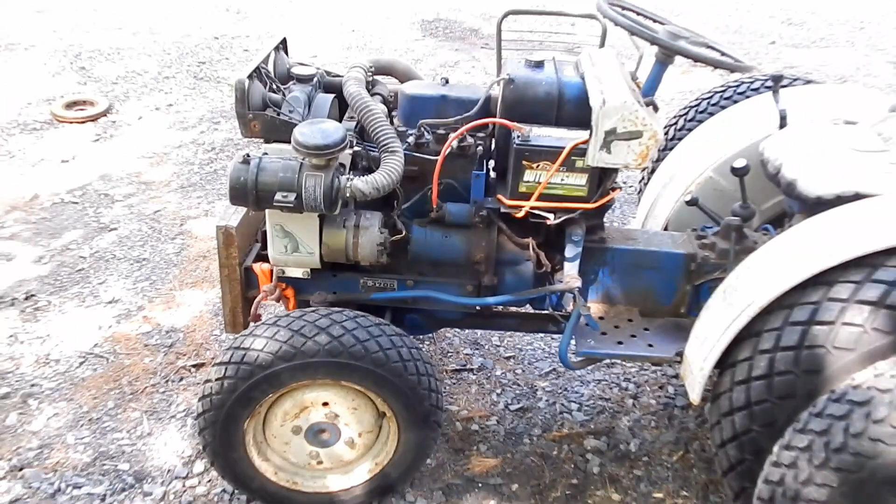Satoh Beaver, small tractor, from the late 1970s, around '78 or so. In the early 70s, 60s, and maybe the 50s, Satoh made tractors with diesel and with gasoline engines, the Mazda gasoline. In the late 70s, they decided to go with this Mitsubishi.

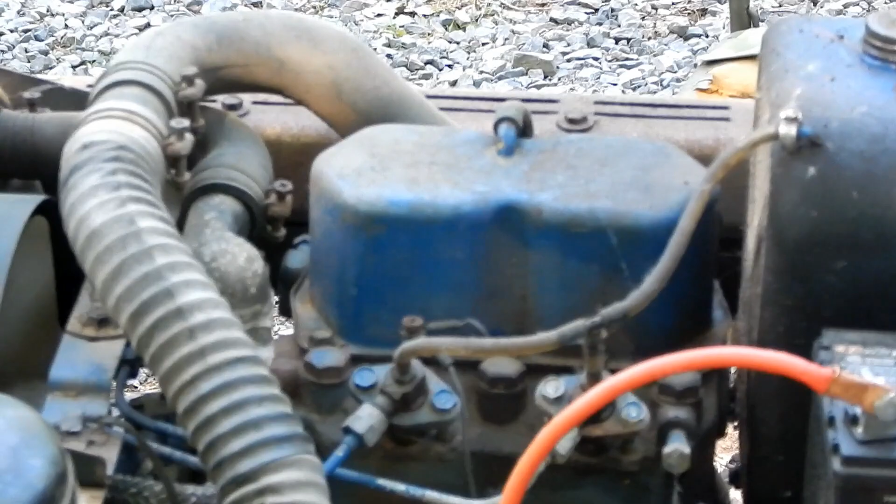Two-banger right here. Underneath that valve cover are two rocker arms from them. Overhead valve diesel engine, Mitsubishi diesel.

It's a good little tractor. I've had it for about 20 years. The only maintenance I've ever done on it was changing the oil about 3 or 4 times. Haven't done anything else. Oh, I sharpened the mower blade.

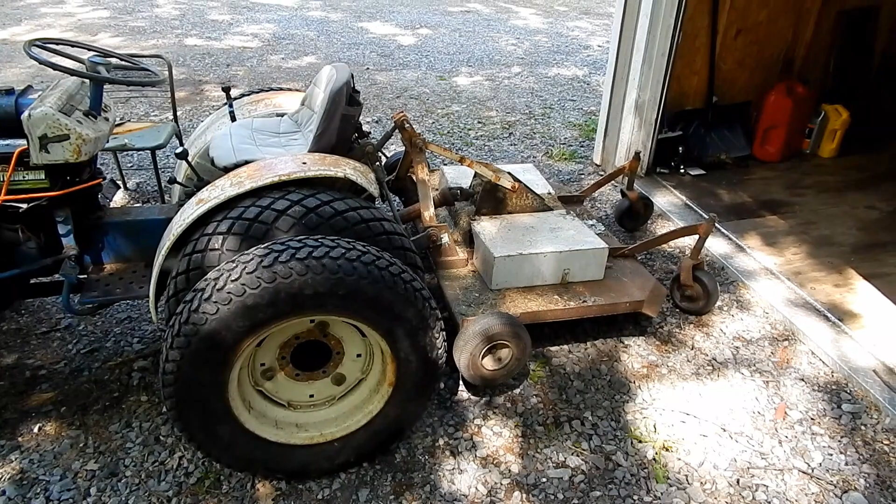Back there is a mower deck. Looks like a brush hog, but it's not, it's a finish mower. Every year or two I got to sharpen the blades.

Does a really great job. It's 48 inch.

I got dual tires in the back because I got a lot of hills and I don't want to tip the tractor sideways on these hills, especially when you got a rock on one tire and a gopher hole on the other, and the whole thing flips over and you die. I can't do much about tipping backwards, so I just want to be careful going up hills. I don't want to tip it going sideways, so I got dualies on the back.

It's 4-wheel drive. I keep it in 4-wheel drive all the time.

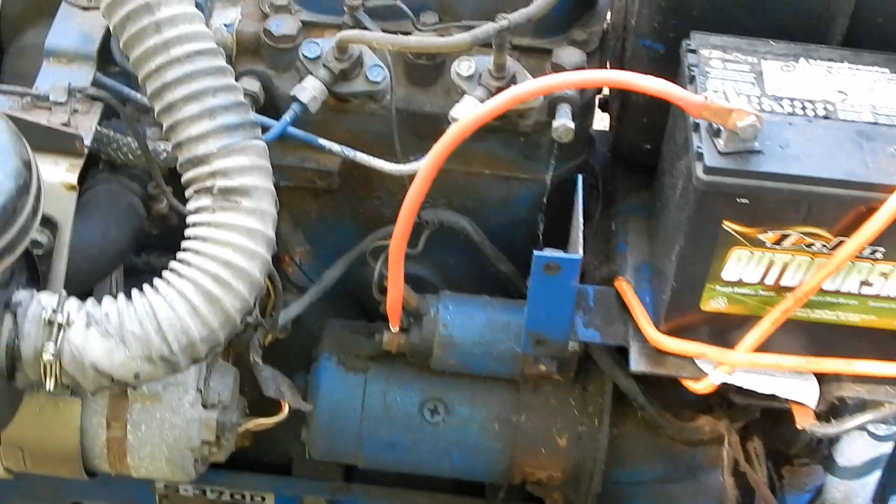It's got a little battery. Those two metal lines are the diesel under pressure, and that line there is an overflow diesel going back to the tank. It's got a tank about 5 gallons maybe.

Air filter, I've never even looked at that. Radiator, headlights, which don't work. I'm not really going to be using headlights. Got a horn. No horn.

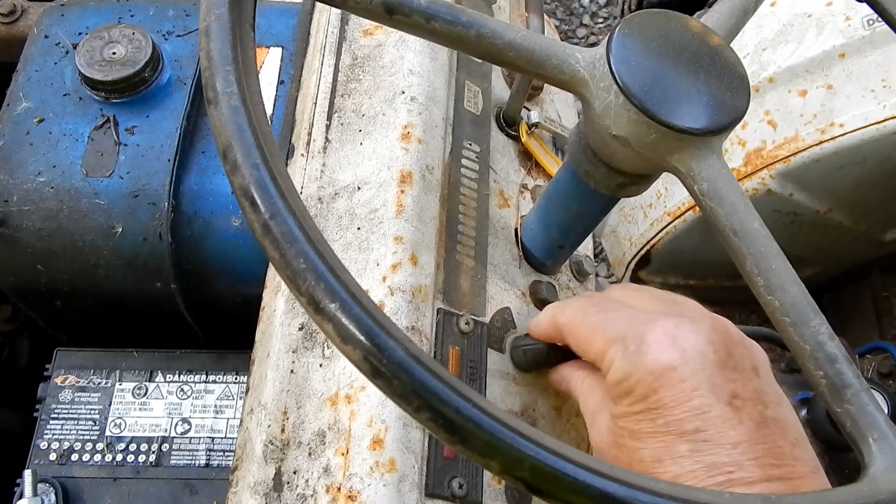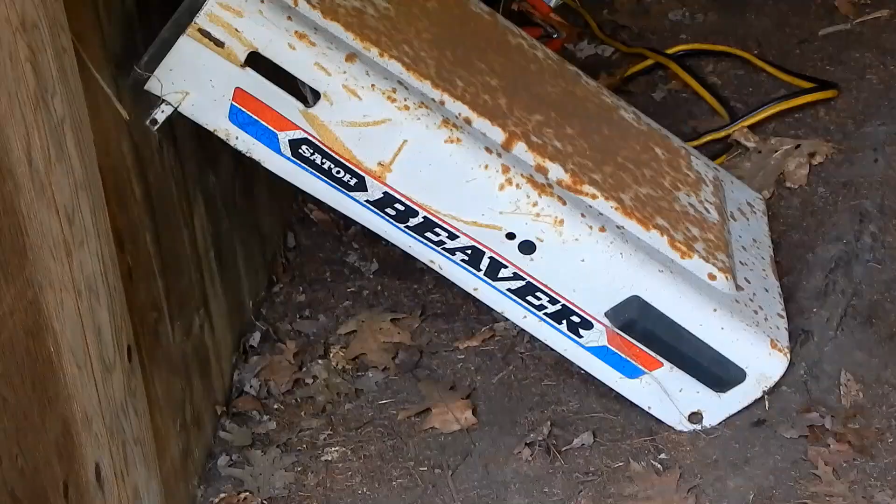It's got a bonnet, which I'm not using now because in the summertime it tends to sometimes overheat after several hours of using it on a hot day. It runs a lot cooler when you take the hood off. It's a bonnet, there's a hood.

Starter motor, solenoid, alternator.

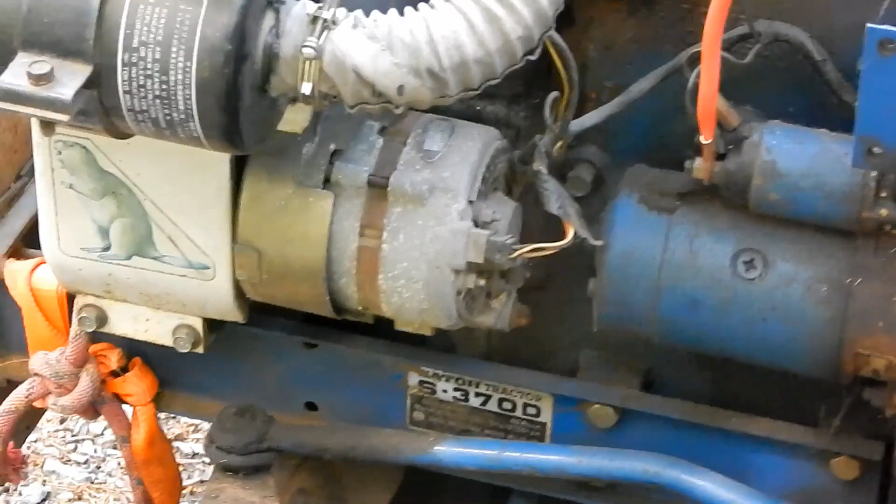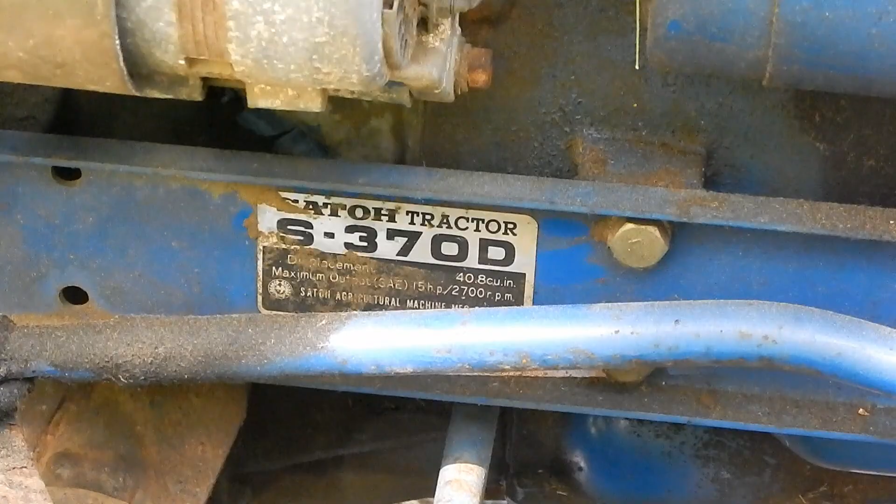It's a Satoh 370D. The D stands for 4-wheel drive. I would think D should stand for diesel, but they figured if D is, you know, D is the 4th letter of the alphabet, 4-wheel drive.

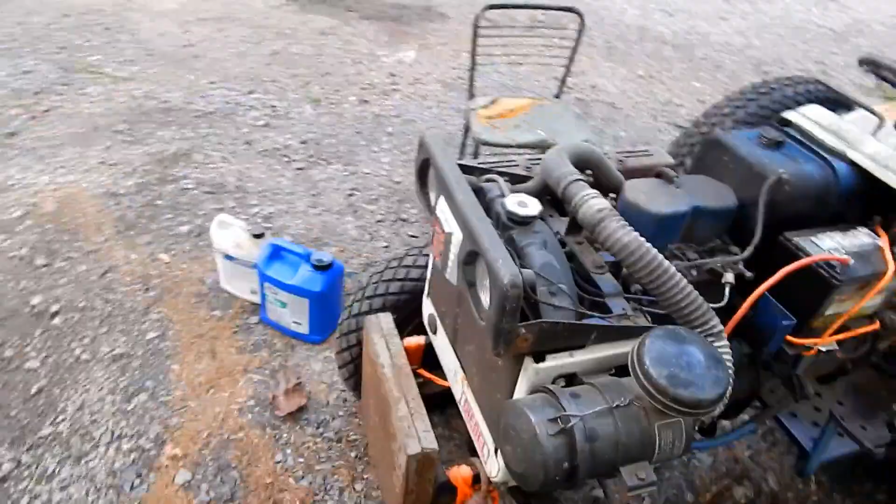I haven't changed the radiator fluid in 20 years either. That's going to be good. That's going to be going next.

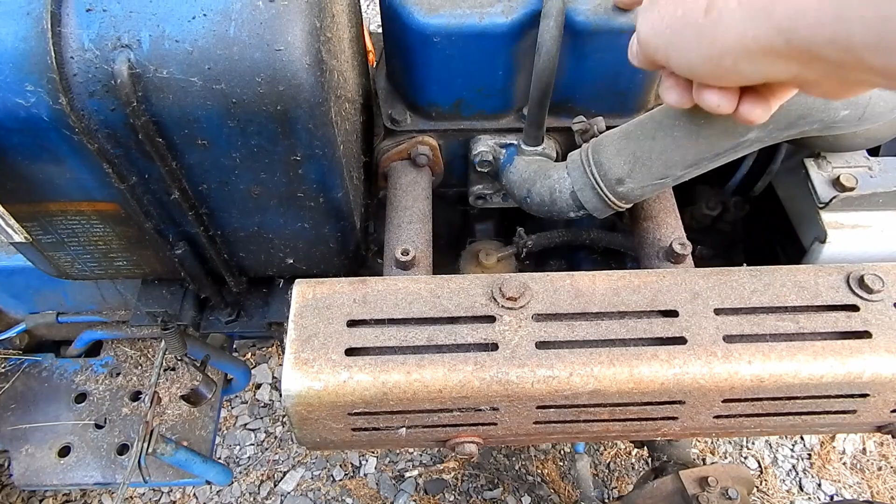There's the muffler. Radiator hose coming over. Well, that's the air hose. Right under here, this is the valve cover. Have never taken that off yet.

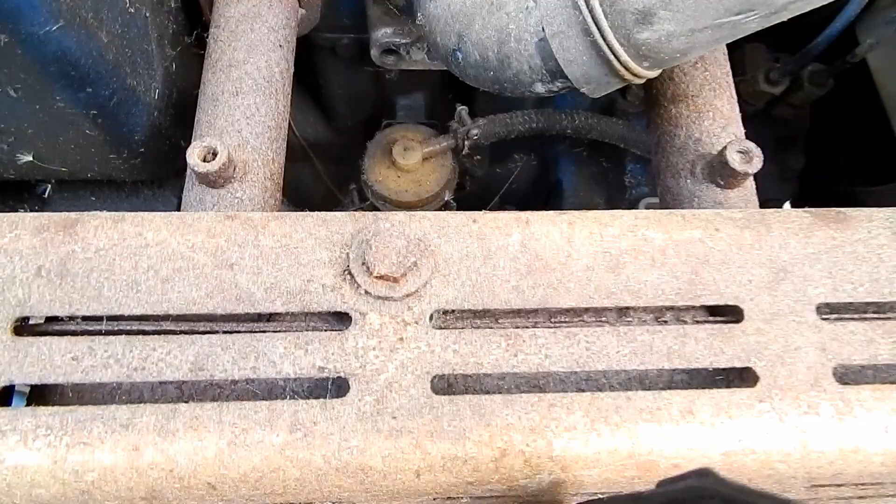Exhaust manifold. That looks down there like the fuel pump. Since it's... yeah, that's the fuel pump because there's the fuel tank. Line goes to the pump, and from the pump it goes to this thing over here, which separates it into, well, that's probably the fuel injector rail of some sort.

Sends it off to those two, which you already saw. Go around, they go around the front here. Those two went up over here, send it to the fuel injectors.

And what about what we got down here? Today's the day that I do the first real maintenance on this thing in 20 years. I'm going to change the hydraulic fluid. The hydraulic fluid is in the gear case.

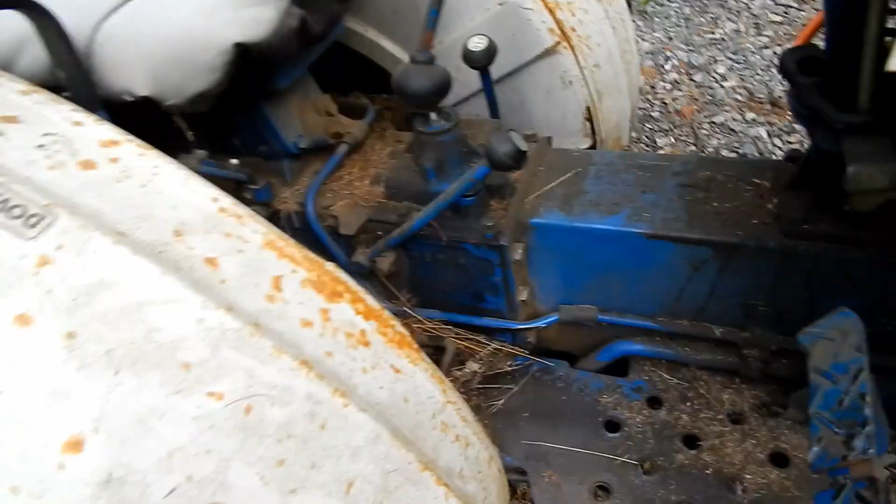This rubber thing here, it's just a little rubber cap. It comes right off with the bare hand. That's where you put in 2.5 gallons of hydraulic fluid.

The hydraulic fluid is basically 80 weight grease. I got some 90 weight, 2 gallons of 80 weight grease, from Walmart. And some 90 weight, which is probably about the same. We use that in cars in the rear end.

That'll be enough to change the... Okay, what we got here? This is the hydraulic pump. There's the engine. This is where you have the...

Well, you change the engine oil. Obviously I'm not going to teach you how to change the engine oil. If you don't know how to change the engine oil, you're an idiot and you shouldn't be watching this video.

But just so you'll know, down under here there's a drain plug for the engine, the oil pan. Here's where you put the oil in. There's a dipstick on the end of that cap, and here's the engine oil filter.

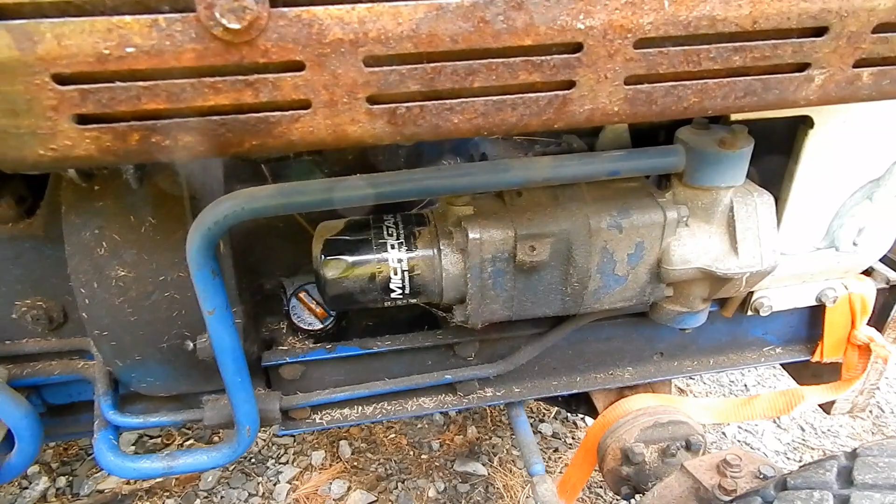Now, why is the engine oil filter on the exact same piece as the hydraulic pump? At first I thought maybe the hydraulic pump works on the engine oil from the engine, kind of like the old fluid clutch 1950 Dodge Coronet that I used to have. The fluid clutch works off engine oil from the engine.

But it's not. The engine oil pump runs off the same gear off the camshaft as the hydraulic pump. The hydraulic pump pumps hydraulic pressure out this thin line. This thin line goes down, wraps around there, goes back under the seat.

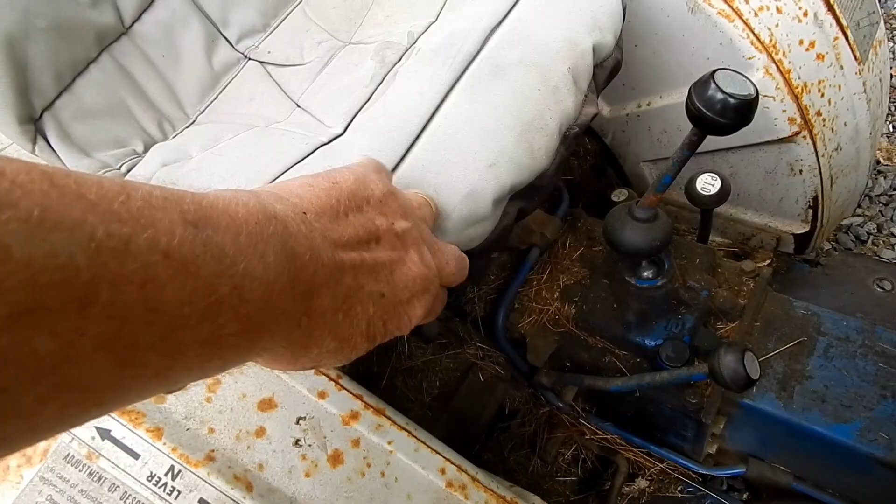You lift the seat, well, lift the seat from the front, and you can see it's kind of underneath all this grass clippings.

There's the line right there, see it underneath all that grass clip. The line goes to the hydraulic cylinder and piston in the back to raise and lower this. That's all it does. It would do more if I had different implements in the back, but all that hydraulic does is raise and lower the mower deck.

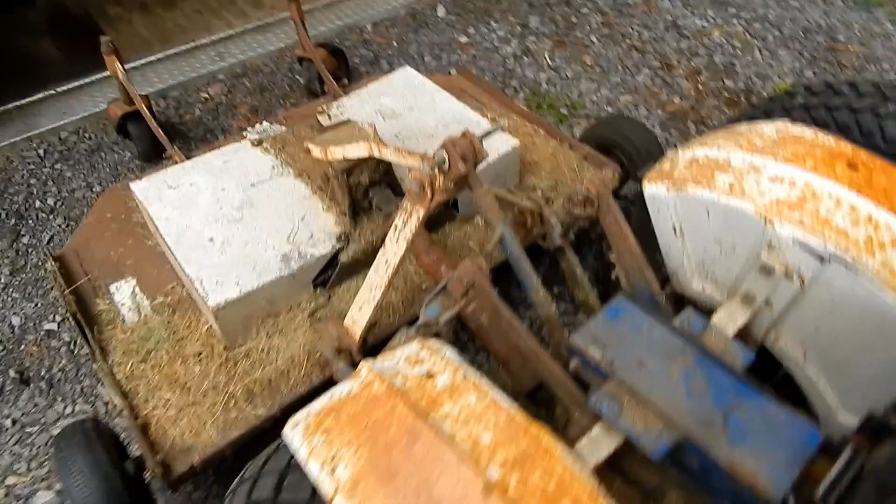Big whoop. There's the seat back. Here's the control for the mower deck. Here's the mower. When the engine is running, you can raise it. When the engine is off, you can lower it.

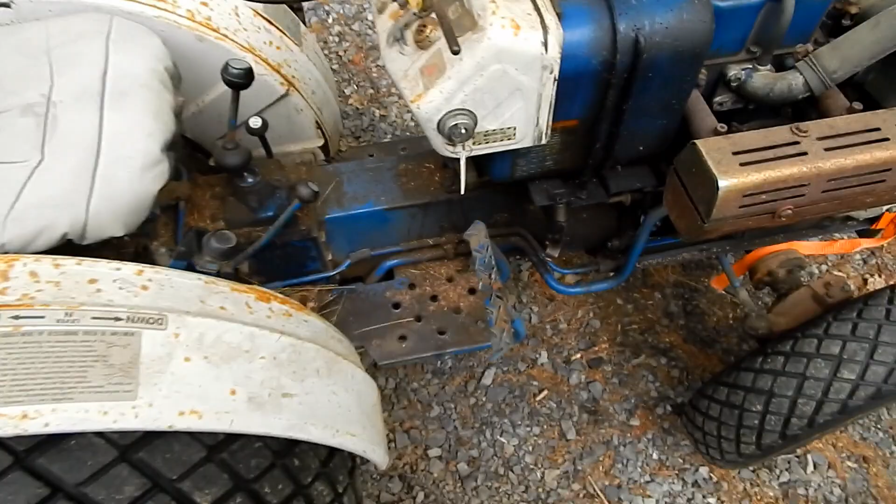And when you lower it, it pushes hydraulic fluid back into the transmission, which is the 8-speed. Well, it is 8-speed. You got 1, 2, and 3, and reverse, and you got 4, 5, and 6, and fast reverse. And over there, that turns the PTO into different gears.

Somewhere around here, well, this is a differential lock, which I don't use. Well, it's actually broken. It doesn't work. The differential lock, I don't need it. There's no mud around here.

The brakes, there's a right brake and a left brake, and they're locked together. In case you're on a big field and, I don't know, you can brake. When you lock them together, they brake both wheels at the same time.

So that's good enough. The skinny line goes to the hydraulic, well, it's the hydraulic pump. The skinny line goes to the opposite of pump, to the whatever it's called.

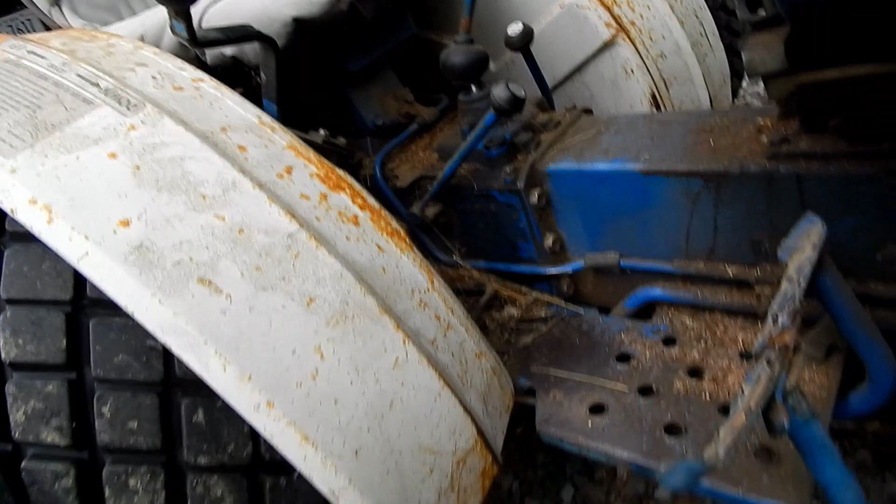This big hose here, well, it sucked. The pump presses out, so it has to suck in on the big line. The sucking of the big line goes to the bottom of that, and there's a big filter on the bottom of that, which I got to change. See, there's the skinny line of pressure going out back to the mower deck, and the big line sucks hydraulic fluid from the pan at the bottom of the transmission, bringing it back to the big line on top, bringing it back to the pump.

Pumps it out, sucks it in. I'm going to put a big pan underneath here. It's 2.5 gallons.

I'll show you how. I didn't know where to drain it from until I finally got the owner's manual. I've never had the owner's manual before. Really weird how you get the hydraulic fluid out of that. After draining it all out, I'll change the filter or clean the filter, put it back in, and put all the fluid back into this rubber thing.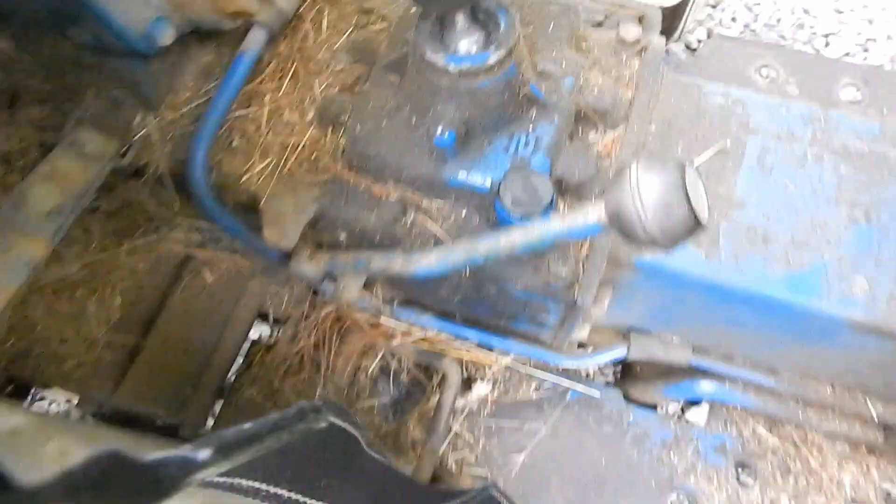This rubber thing right here, you just... see that? Every once in a while I put some fluid in there. That's all it is. Okay, I'm going to start doing that now.

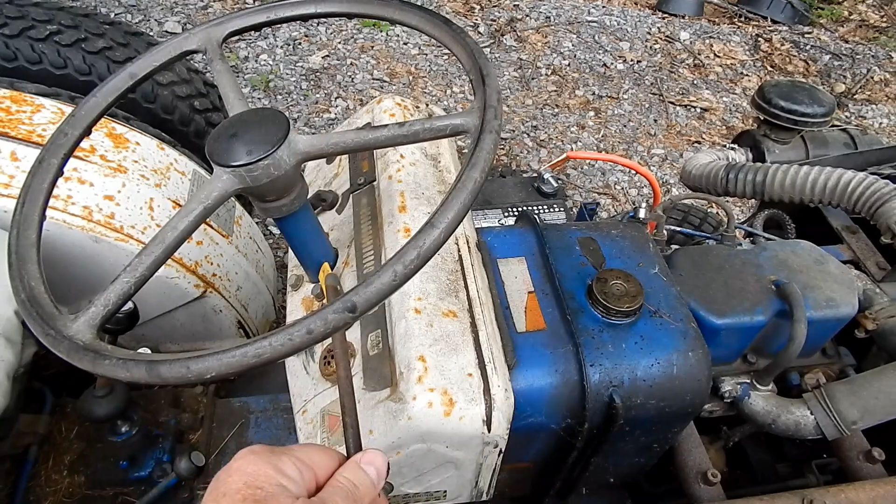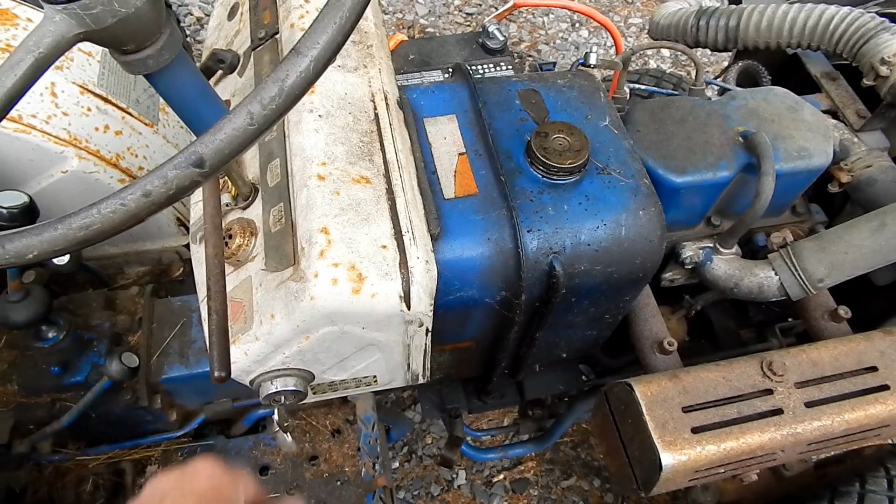This here is the throttle. This is low idle, faster idle, real fast. And when you want to stop it, you press it all the way up, turn the key to the off position, and then you press more and that shuts it off. Otherwise it's going to just diesel forever.

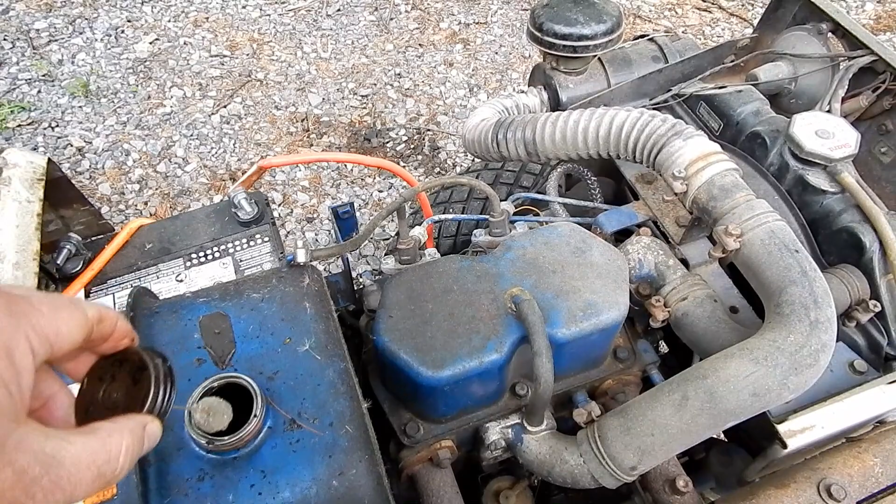Real quickly, actually, there's no fuel tank gauge. I use a stick, a paint stirring stick, and this here, it's a brush from PVC glue.

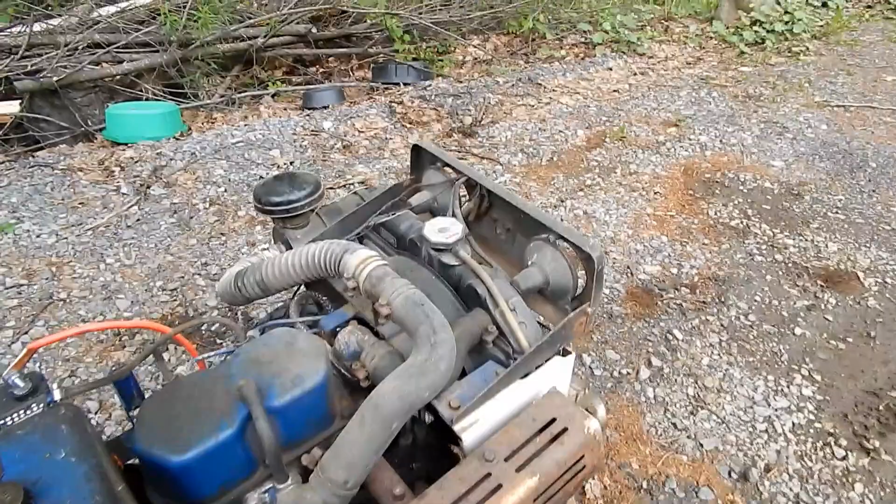All right, I'm gonna change the hydraulic fluid. I'm gonna change the front axle fluid, the front final drive fluid, and the radiator. That hasn't been changed since I've owned this thing. I just keep adding fluid to it if it needs it, never bothered to drain it. And if I go crazy, I might even open up the air filter and see how that looks.

What else? Oh! Why not? Since we're going hog wild crazy here, why not take the fuel filter out and see what I can do? Where would I get a new fuel filter? Take it out, clean it with soap and water maybe, and just put it back.

Who knows? I've never had to do any maintenance on this thing. I think one time one of these two return lines broke, so I went to the hardware store and got some new fuel lines. That's all. I mean, this is like maintenance free, or repair free. It's only maintenance free because I don't ever do any maintenance.

About time. I bought this thing back in 1998 and now it's 2023. That's 25 years I've had this freaking thing. I don't even know where the damn clutch is. Brakes, I don't repair them, I don't fix the brakes. All I've done is put dualies on, sharpen the mower blade, and change the oil a couple of times.

And there you have it. Satoh Beaver with dualies.

I used to have a big weight in the front. That fell off. Don't need it.

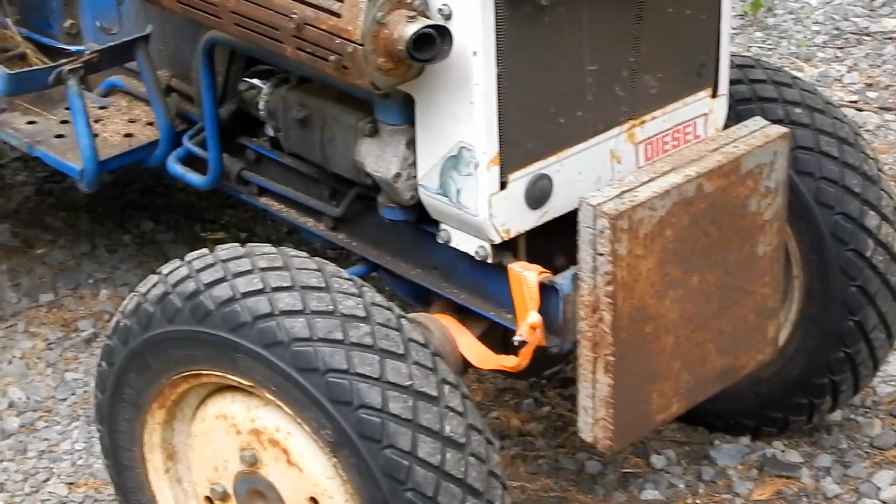1917 Buick E49. Runs like a top.

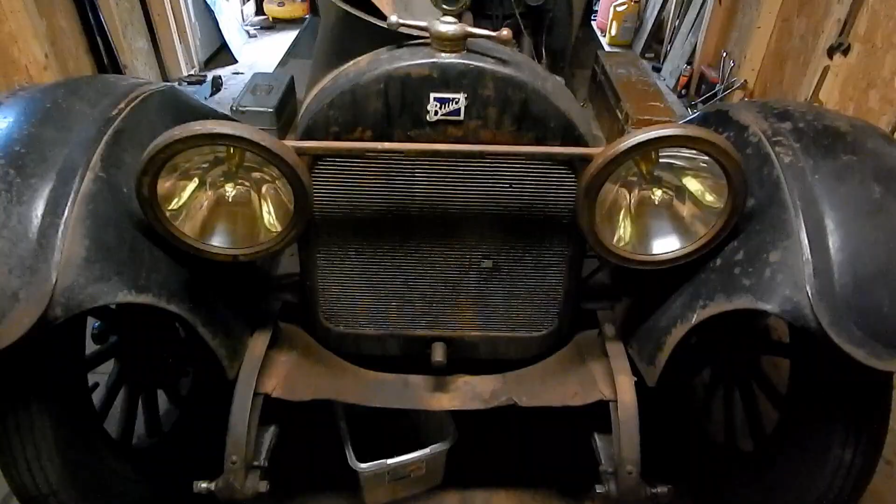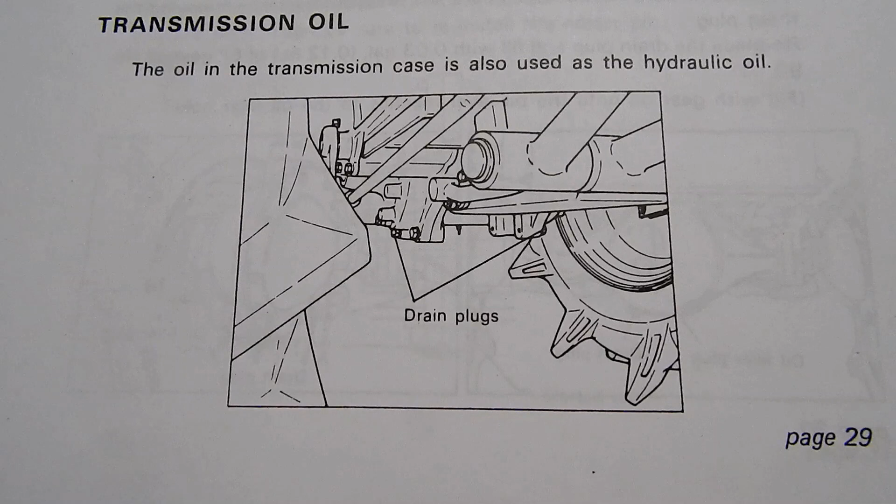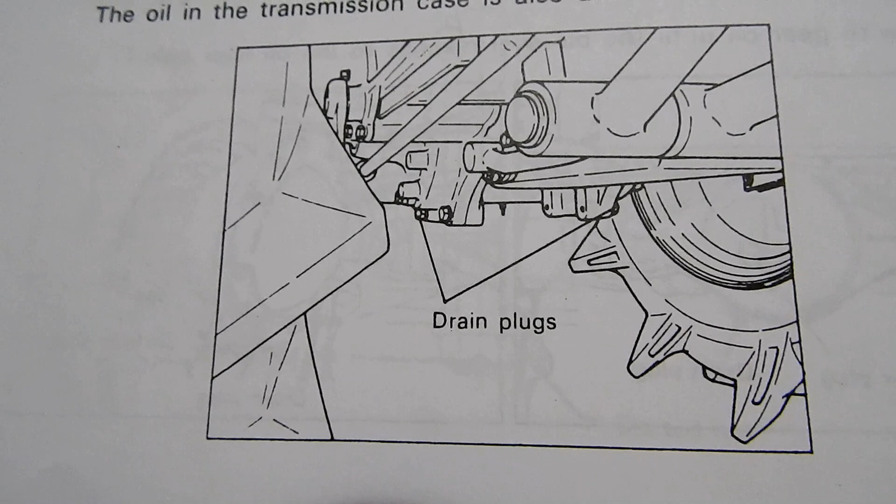As you can see, the owner's manual tells you that the drain plugs in the transmission, there's two little bolts you take out right down at the bottom of the pan. They're not drain pans. You would never know unless you knew what you're looking at. I'm going to try and find those two holes and drain the 2.5 gallons of hydraulic fluid out of that gear case.

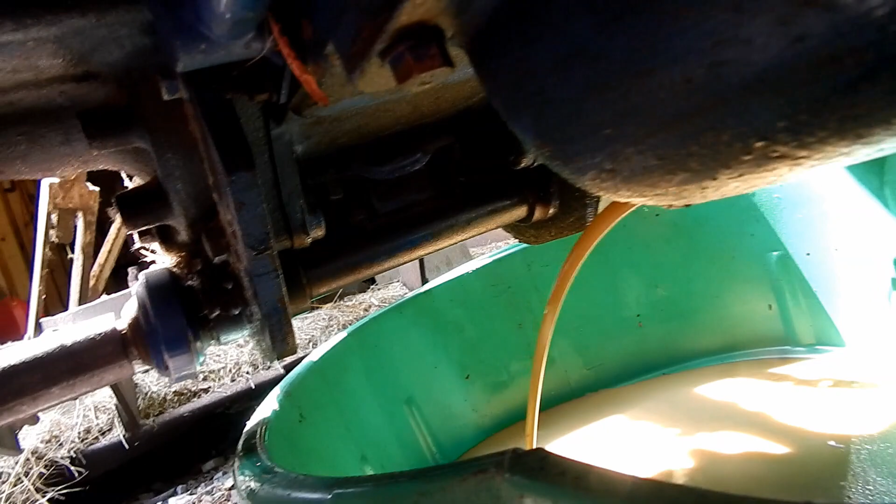Well, it's not like the picture at all. It's got one drain plug in the middle, on the other side, and the front. The drain plug is on the front, and it is like a little pan. The illustration showed no oil pan for the hydraulic oil at all.

And what's coming out is weird, it's milky. That's the color - milky is the color of regular tractor hydraulic fluid. This is supposed to be 90 weight and 80 weight crankcase, differential gear case stuff. That's that milky white stuff coming out. But it's really thick, it's going to take an hour for it to come out, so I'm just going to put it here and get back to you.

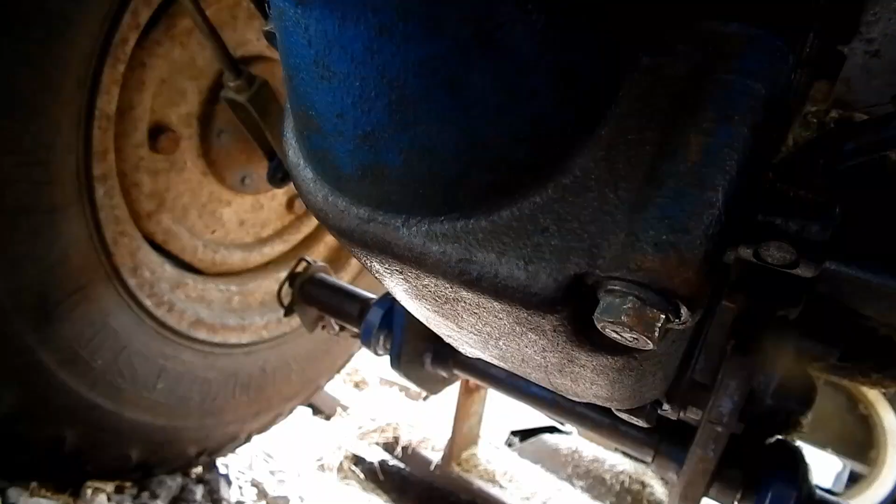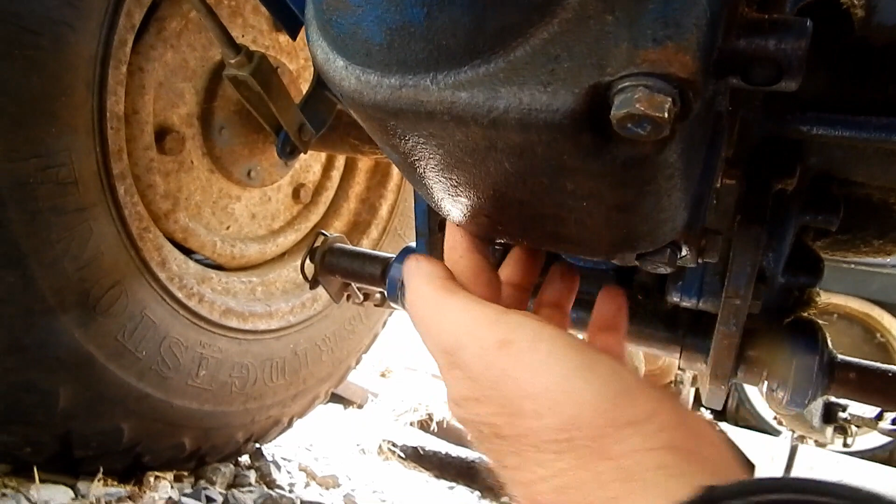Okay, I said before that the front of this is the oil pan. It's not even a pan, it's very different from the illustration. I guess maybe because this is 4-wheel drive and the illustration is for 2-wheel drive. I don't know, but the drain plug is in the back. My finger is on the drain plug back there, and this is the front, this is the left. And on the left side of the vehicle is a hydraulic fluid filter.

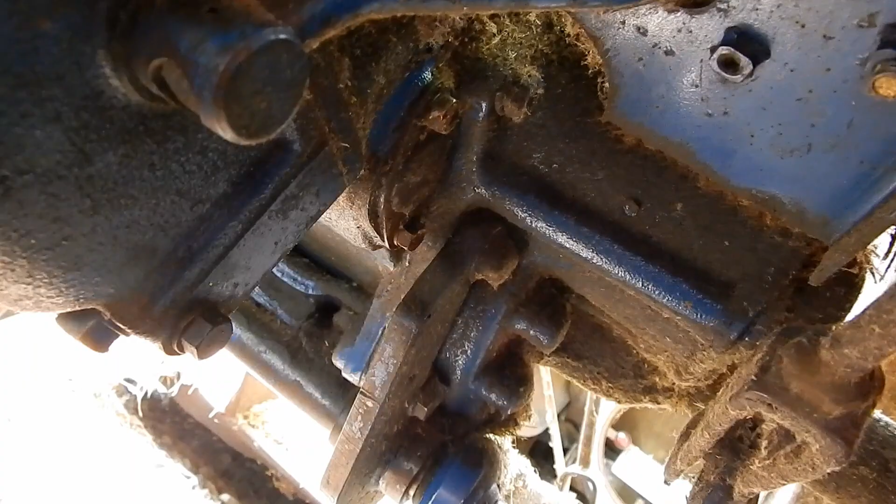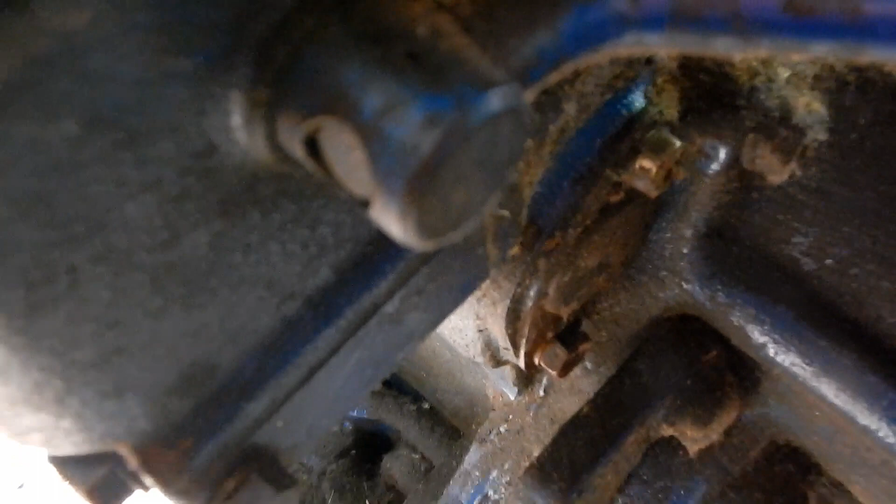It's back there, I'm going to put this wrench on one of the bolts. That's one bolt, it's a 12 millimeter wrench, 12 millimeter there with this big round thing in the middle. Apparently there is some kind of hydraulic fluid filter in there, according to all the illustrations. It's on the left side, the opposite side from where the hydraulic line is.

Okay, this is facing forward. That's the back.

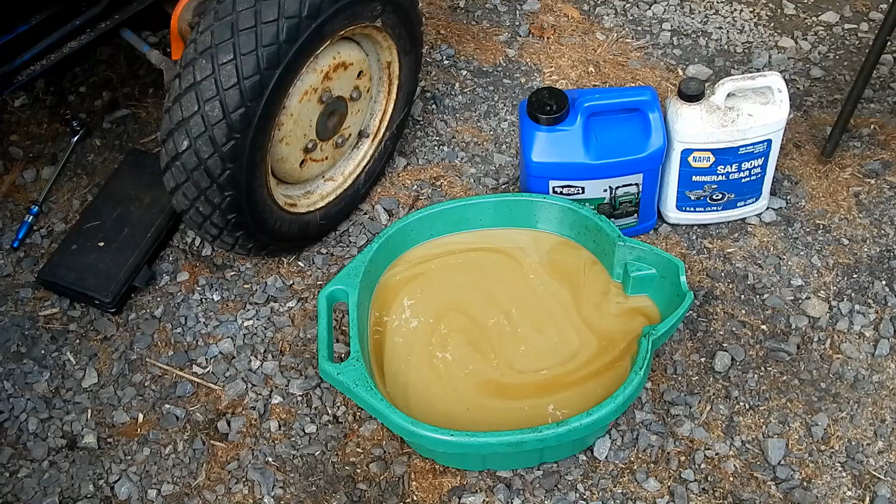24 hours later, got 2.5 gallons of stuff out of it. I'm going to put the plug back in, such a little plug.

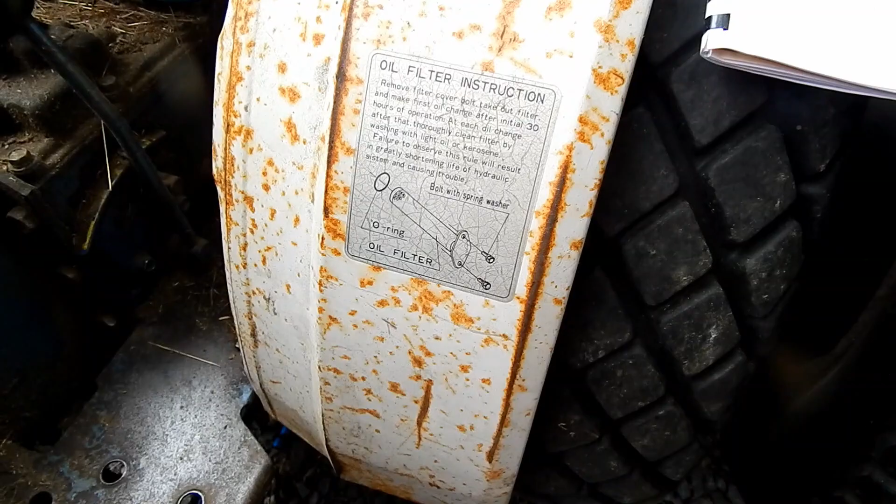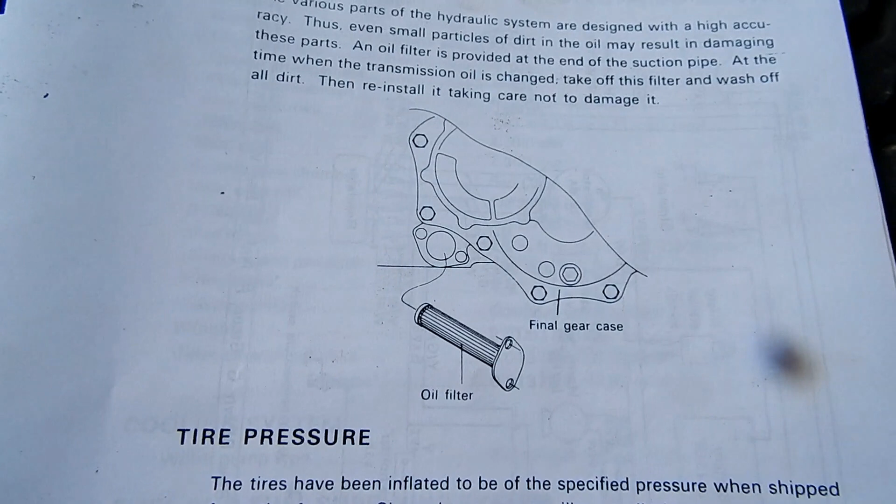There's an illustration right on the tractor that shows a picture of the filter. You take the 2 nuts off of that thing, there's a filter, and it's the same as the illustration in the manual. Somehow there's this thing here with a filter on the end that goes into the tractor. I just took the 2 nuts off, let's see if I can get this thing out of here. There it is - judging by how flush it was against the body and how little leakage there was around it, my guess is that this has never been changed since 1978.

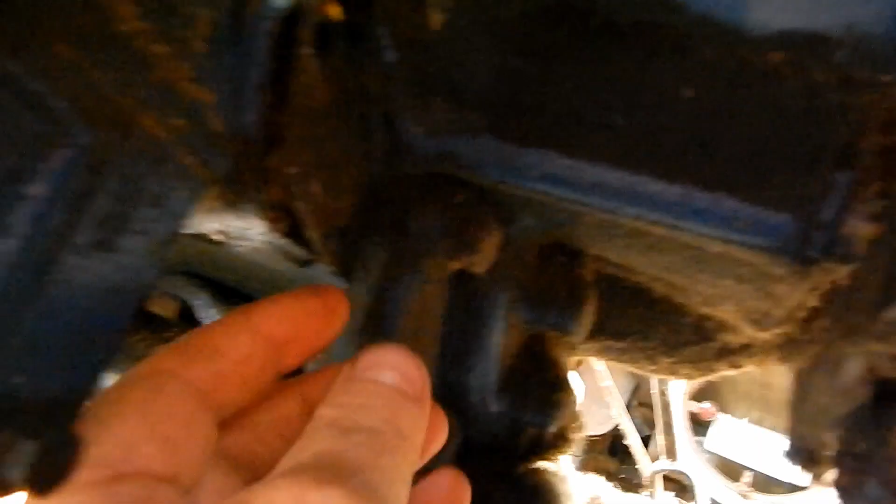There it is, look at that - dirty old oil filter. Oh, it won't come out all the way, it's bumping against this linkage here. It's bumping against this linkage from... this is the brake, the left brake. Won't come out all the way. Alright, there it is, it's pretty dirty.

Okay, after messing around with the brake linkage and everything, I've decided I can't get it out without removing the brakes, which I'm not going to do. So I'm going to wipe that off with some paper towels, spray it a few times with WD-40, wipe that off 3 or 4 times until it's all clean, and then just put it back in. That's good enough, because it will not come out, it's too long, it bumps into the brake linkage. I got the brakes on lock and it still doesn't move far enough forward. Can't do it, no can do.

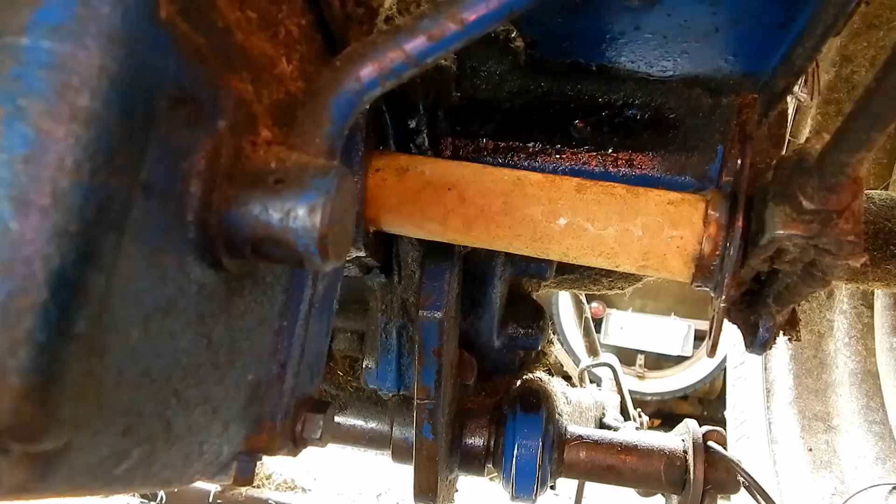That means this thing has never been cleaned since 1978, boys and girls. And it looks pretty good. Okay, and there it is, clean as a whistle. Put it right back in, put the bolts in. Next.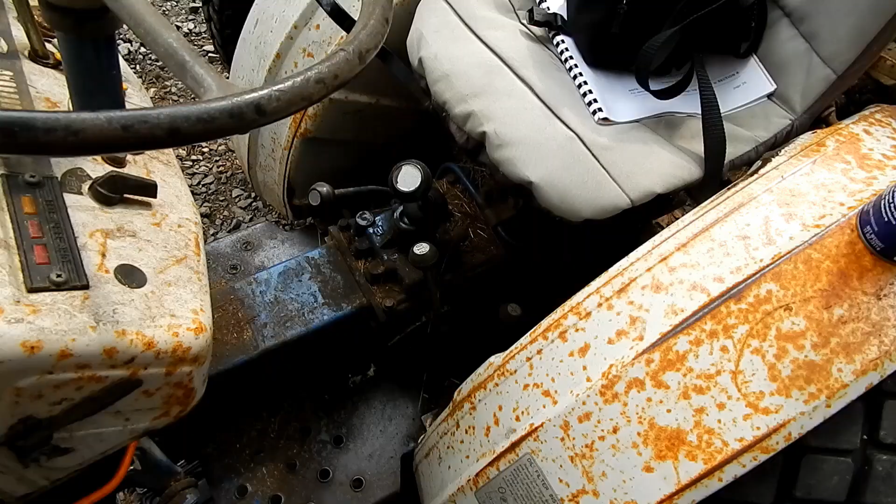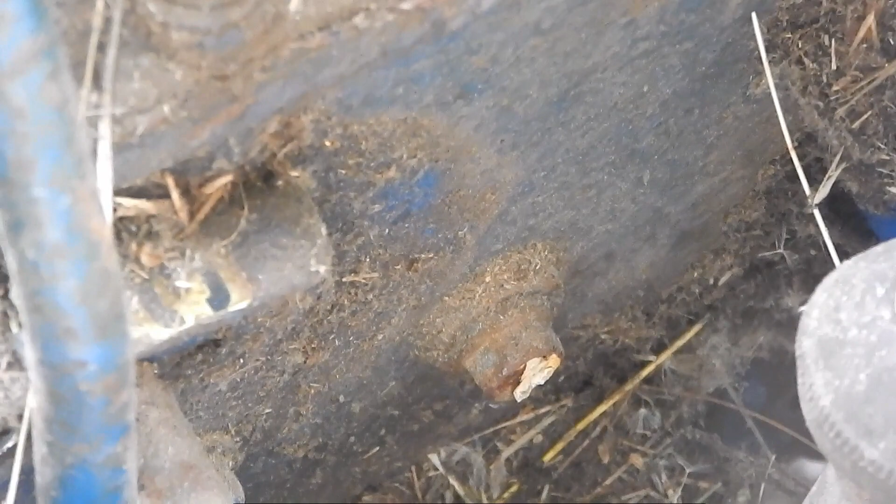According to the instructions, there's a bolt down here, right there apparently. Oh, thanks, there it goes. You're supposed to take that bolt out and put oil in until the oil starts leaking out that bolt hole - that tells you when it's full. I'm not going to do that, I know it takes 2.5 gallons, so I'm just going to put 2.5 gallons in. That's it.

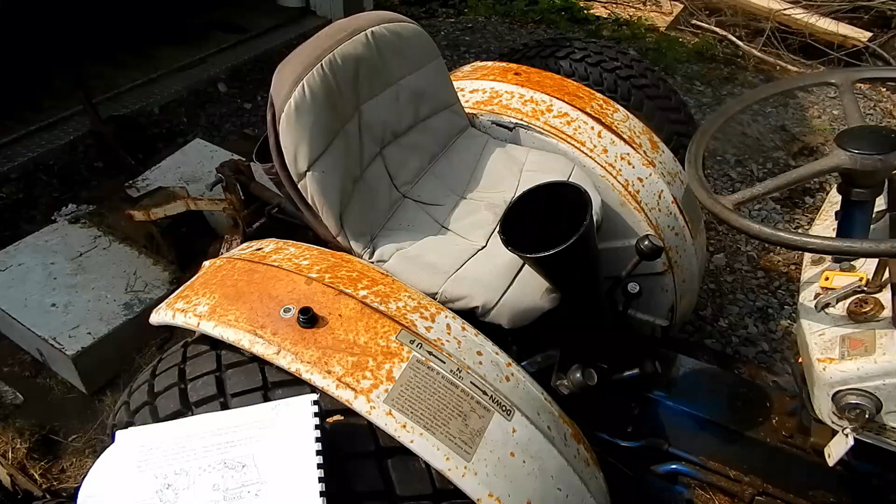And there you go, 2.5 gallons of 80 weight gear oil. And there's no differential in the back, the transmission goes right to the two rear wheels. But it's four-wheel drive, so there is a differential in the front, and there's a final drive in the front on each wheel.

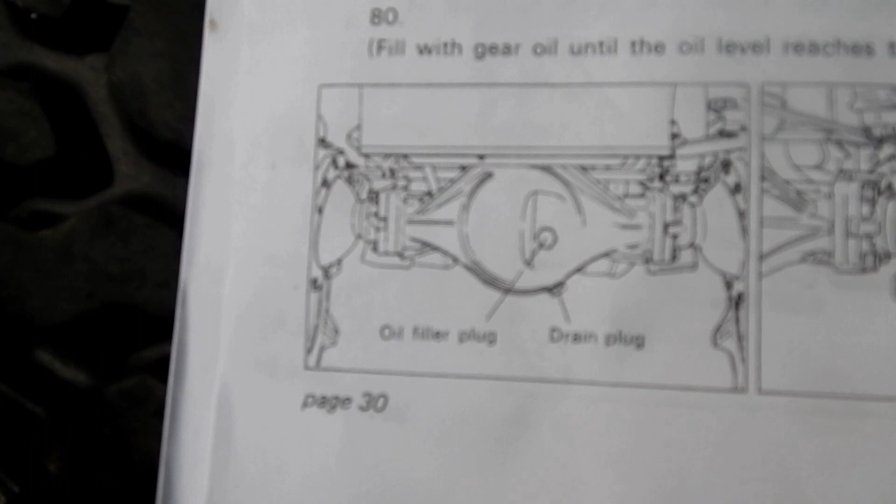According to this, you gotta find a drain plug for the differential and an oil filler plug. That's cool. And a small, tiny one for the front, which I'm gonna do also.

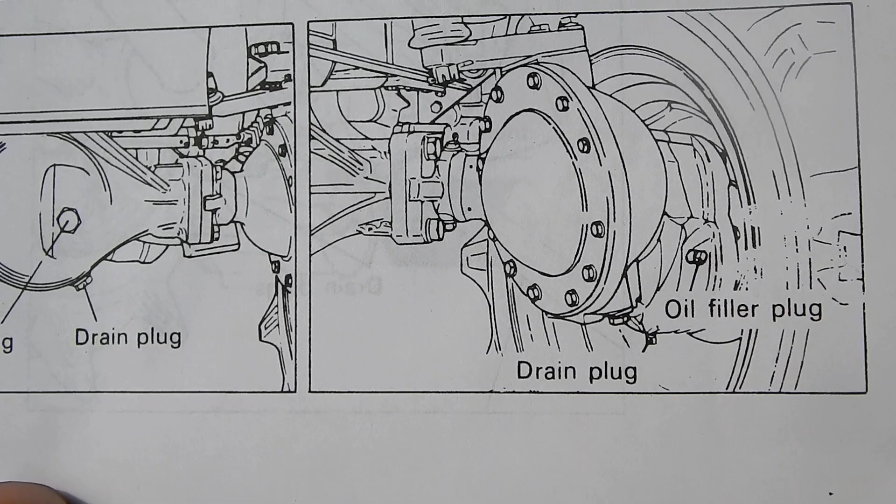I'm in the front of the tractor now. There's your fill bolt. There's a drain bolt, the biggest I have is 21 millimeters and it ain't big enough, so I gotta go off and find a bigger wrench somewhere. And I'm not gonna show you this because it's just you drain out the oil and you fill it up there. And there's a drain plug in the wheel down here.

And it doesn't take a genius to figure out, you drain that according to the illustration. There's a drain plug on the bottom, down there apparently - there's no plug there, huh. Oh, here, and the fill plug is on the backside. My bolts are pretty smooth. Everything looks good. All right.